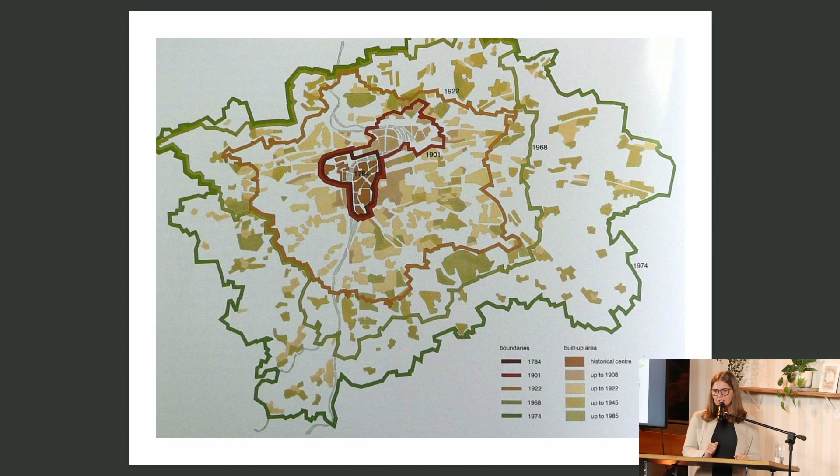Again, we are in Prague. A picture you might see a little bit here because someone was presenting Paris. So we also had our very own Le Corbusier, Josef Havlíček, and he wanted to add some high-rise buildings into the tissue of Prague. So maybe you recognize the famous bend of the Vltava River on the left part, and there, right in the center, right behind the old city, you see those three skyscrapers.

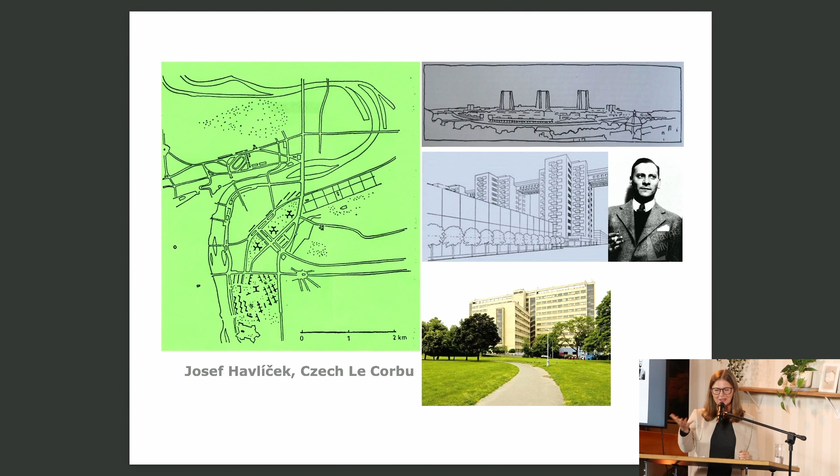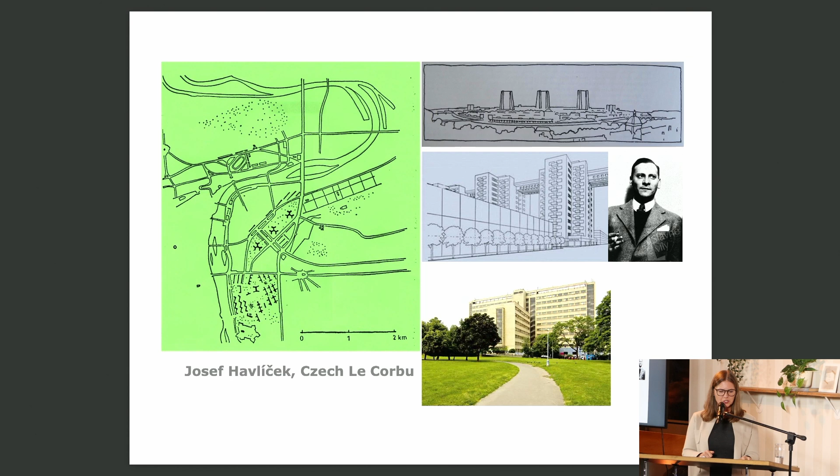One of them was meant to be a United Nations building because at the time they were seeking a new seat. Unfortunately, finally it wasn't Prague, so this was also not happening. Havlíček was also author of something which is very close to unité d'habitation. So the building at the bottom, this is an experimental housing. Very famous, but with a lot of problems. They had a very minimal kitchen, so it never worked in the intentions that it was planned. But there was a very, very strong vision behind it.

So going into mass housing, we discussed through those two days the aesthetics, how important the former aesthetics, the original aesthetics of this housing is. And let's say that for the people in Czech Republic living in those estates, most of them, they really don't care. It has a lot to do with the situation that they were not really voluntarily choosing to live in those blocks of flats. There was basically a list of the families, and when you came to the top of the list, you were awarded some type of housing.

But I have to say that this housing was appreciated, because comparing towards the derelict centers of the cities, and I already mentioned that the situation in many, many centers of Czech cities was really derelict, really hard. This housing in the outskirts, but still, as you have seen in Prague, quite near to the center, connected with tram or even with metro, that was appreciated because the quality, the comfort was really not comparable with what you had in the old cities.

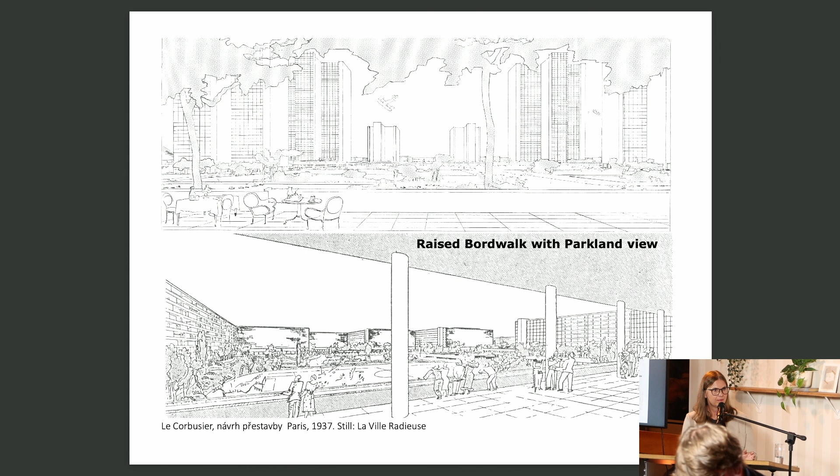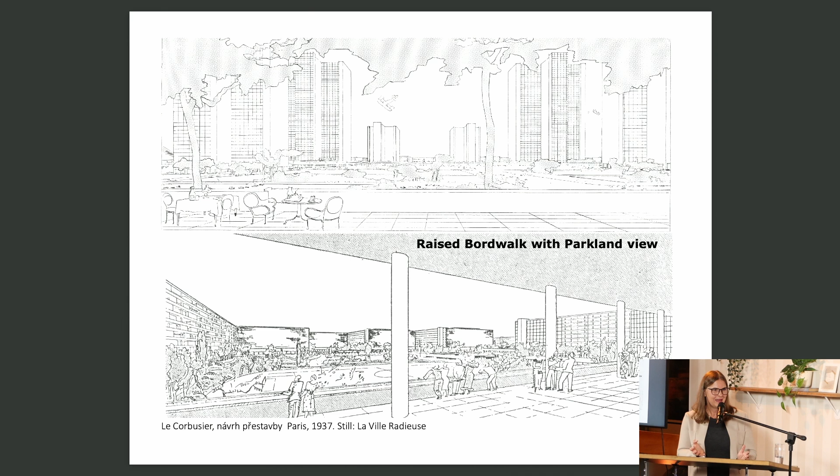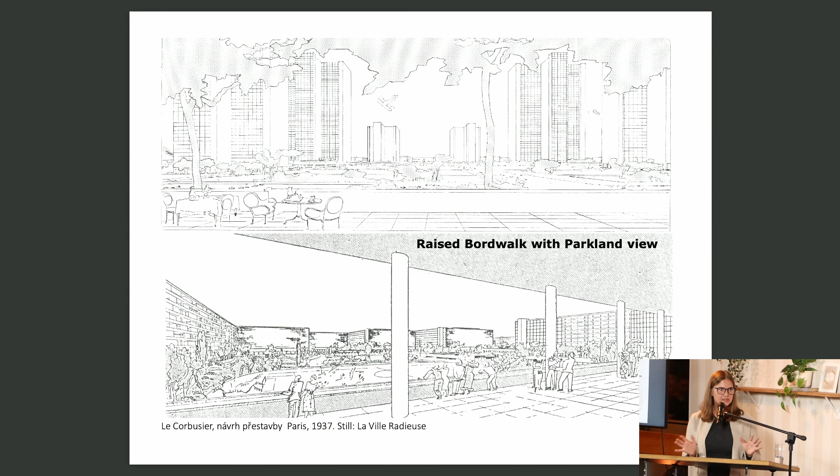The examples we had where it was tried, it was a disaster. Because there is a very old psychology behind it. If you're walking through the open space and you don't feel comfortable, you can always escape. In the closed corridor or at some elevated sidewalk, this is limited. Plus there were issues with maintenance and many other things. So this ideal approach was used somewhere, but not massively because it generated a lot of problems.

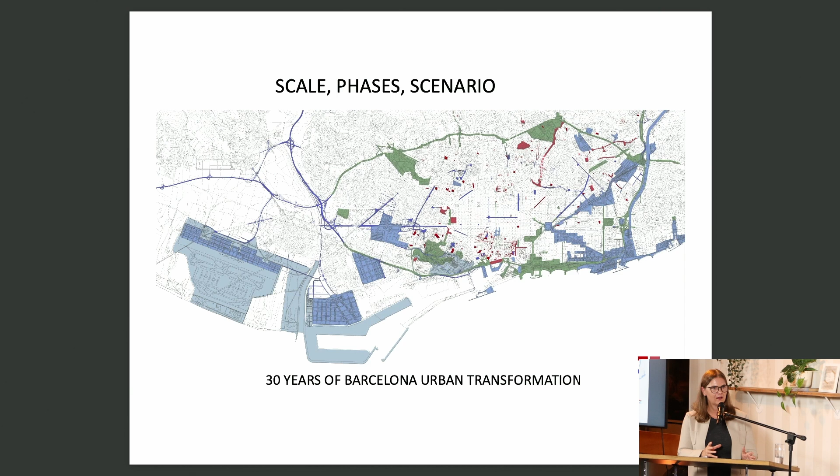And we spoke about infrastructures a long time. So we already know that the infrastructures on the level of technical infrastructure and transport infrastructure, but also public infrastructure like schools and amenities, are very important. So that was the second level. And the third level were public spaces. So what to do with larger areas like the 80% of the public space we have in the mass housing, how they can be changed and what will be the steps.

So the question is, do we allow the modernistic neighborhoods to grow and change? Here you have the original design of Ildefonso Cerda for Barcelona, and the steps which actually happened in the next, well, not only years, but tens of years. So the question is, is the original design weaker today? And if we're saying yes, where is the boundary?

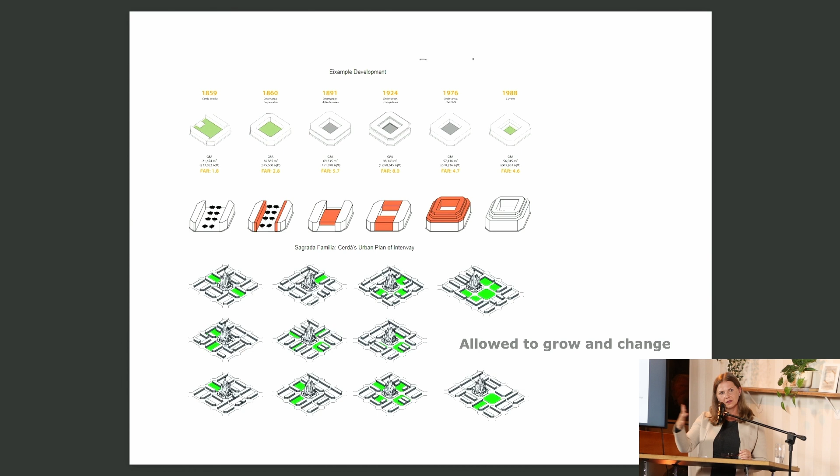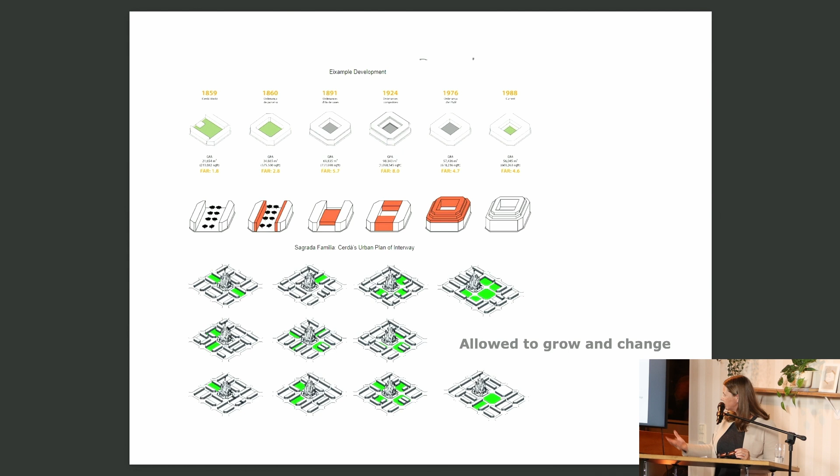So would we be able to set a similar boundary for the modernistic neighborhoods? Because I think that we all agreed through the discussions in those 2 days that some change is needed, but the definition of the boundary is needed as well.

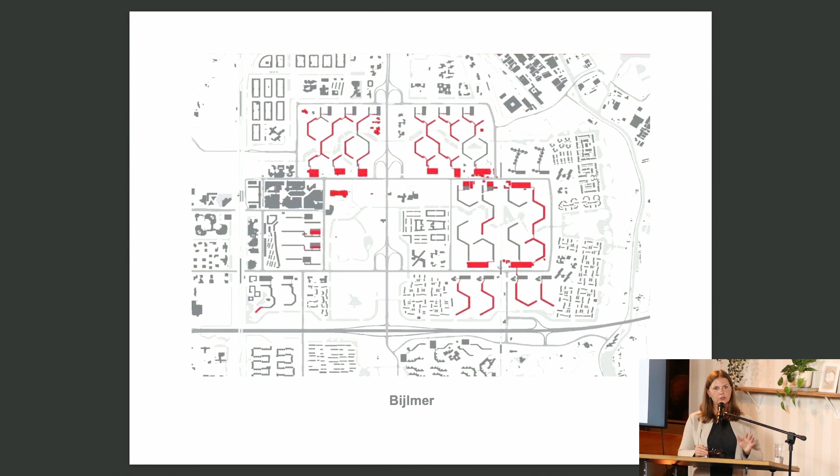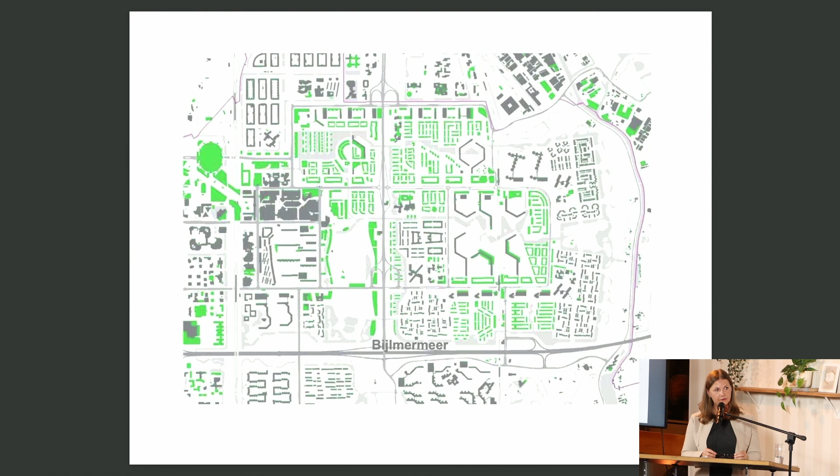So the question of density, how much, again, where is this boundary? Up to what amount are we able to add, not to destroy the strong original concept of the modernistic neighborhood? So this is, I think, also the question we have to think through, and maybe this will be a part of a manual we partially agreed that we will work on.

And I'm not saying that this is the only way to do it. This is just a question, and I think that can be a very interesting discussion if we allow it, if this is something which is imaginable for us, because I think most of us really appreciate the modernistic approach and the modernistic neighborhoods, modernistic architecture and urban design. Okay, next, please.

When I was thinking what would be the imperatives, the important words, the important actions which should be taken in the modernistic neighborhood, what came to me was that actually I don't think that it's different from any other neighborhood. Not that much. What you're looking at is a recycling process of a building.

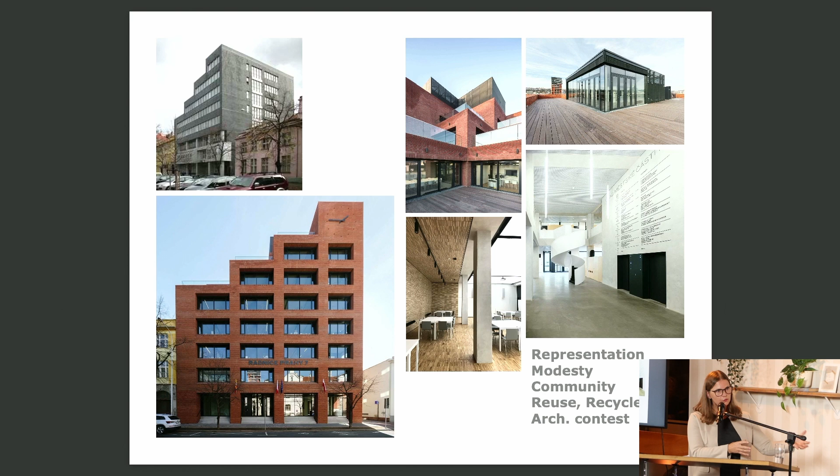But once you get the proposals and once you get the pictures, then the discussion is much better. Then maybe you will really find out what is important for the people who have no architectural education at all. Okay.

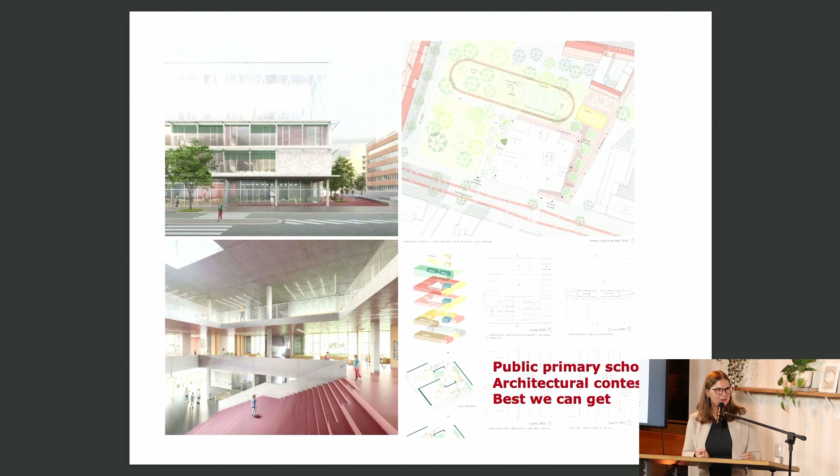Public primary school, again, an architectural contest in an area which is really derelict. And again, we were trying to find through the contest the best solution possible with a very limited budget. So to put the school somewhere where it was not imaginable to have one was a part of the process and of the challenge. And next,

not only in the traditional city, but also in the modernistic neighborhoods, the connections are important. I was quite surprised when we walked through Neustadt that there were some fences, because I'm not used to seeing them in Czech modernistic neighborhoods. You're not allowed to put fences anywhere because the land is owned by the state or by the city. Generally, the very low fences are just around the children's playground or spaces like that, which should be protected, but not because that's the property of someone.

And also, I took pictures where there was a sign saying that's private property and you're only allowed to park your car there if you paid some fee; that was also in Neustadt, such signs. So I was surprised that there were already areas which were more like private or rented, or I don't know how to describe it. Maybe in the discussion you can enlighten me how it really works here.

Please, can you go back?

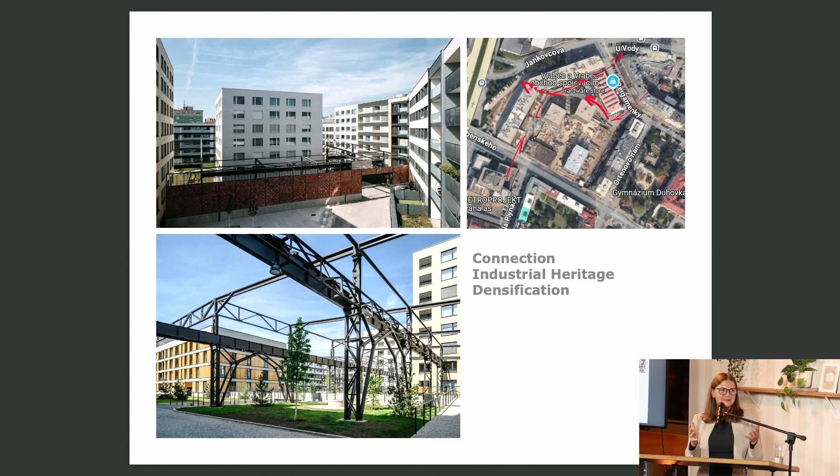This is just an example, but connections, the space without fences, without additional spaces where you can't go through and you have to go around. This is something which is very important also in the modernistic ensembles. Generally, they are there, but I have seen also some projects where this public space was really divided by fences into very small pieces, and then the whole thing ceased to work.

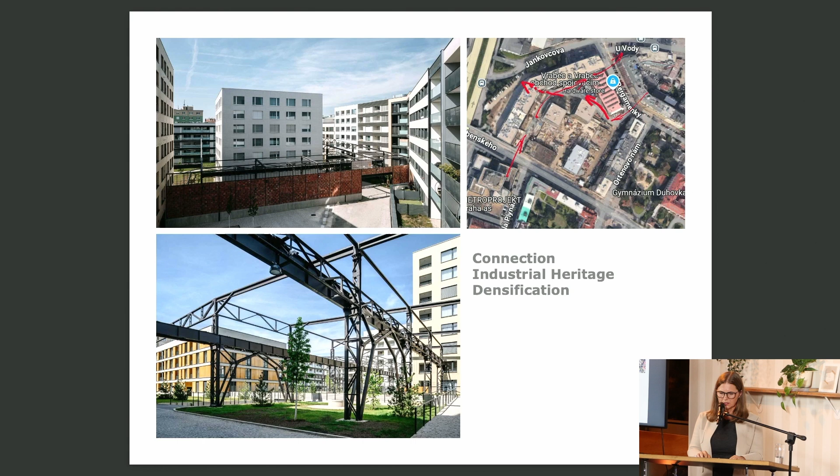Here we are by the riverside, and this is representing an approach towards public spaces. The biggest problem I see in the modernistic neighborhoods is that there are a lot of public spaces, at least in the case of the Czech Republic, and they are not programmed. Yes, there are some children's playgrounds, but the majority of the space in our context, and it might of course differ in different European countries, is just empty and quite badly maintained, because the amount of money you're getting for maintenance is really low.

So to add something which will be at the same time inclusive, programmed, and resistant. This is a very important issue for this public space, this park, that everything is resistant. Also because it's a flooded area, so it was designed so that the flood can just go through it and nothing really happens. All the areas are inclusive, they are open.

They are using advantages of the landscape and of the remains of the industrial heritage, but they are programmed. So of course you can do whatever you want there, but there is always something which allows you to do something specific. If you're using it in another way, then it's up to you.

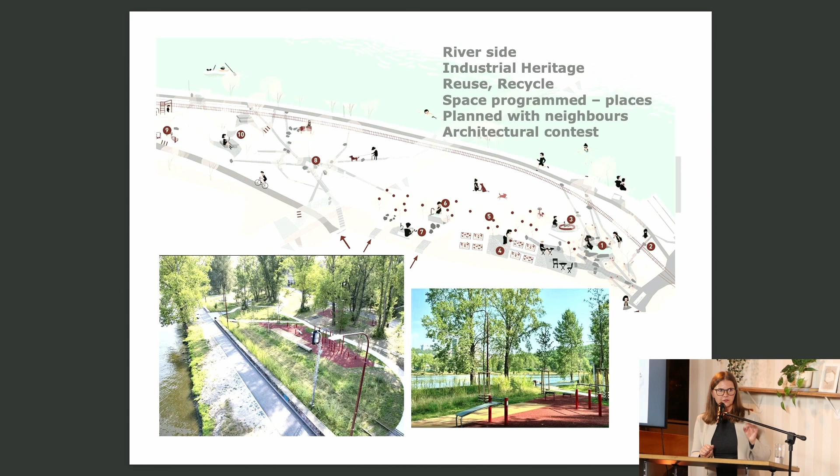So here, the use of the landscape, because in the modernistic ensembles you have different types of landscape. Somewhere it's more monotone, somewhere it's really rich. What I have seen in Nantes, when they did a conversion of the industrial island, the first thing they did, they went through the whole landscape and made something they called a map of treasures. Even if the treasure was a tree or a small garden which unintentionally or intentionally happened to be there, which are actually the tiny spaces we do have in the modernistic ensembles as well.

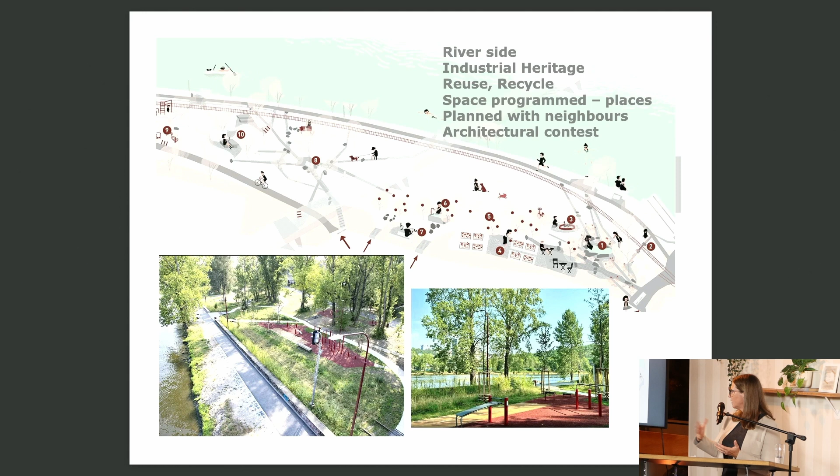So the map of treasures, and then maybe more programmatic areas to encourage people to use the space, which is significantly bigger than in the other parts of the city.

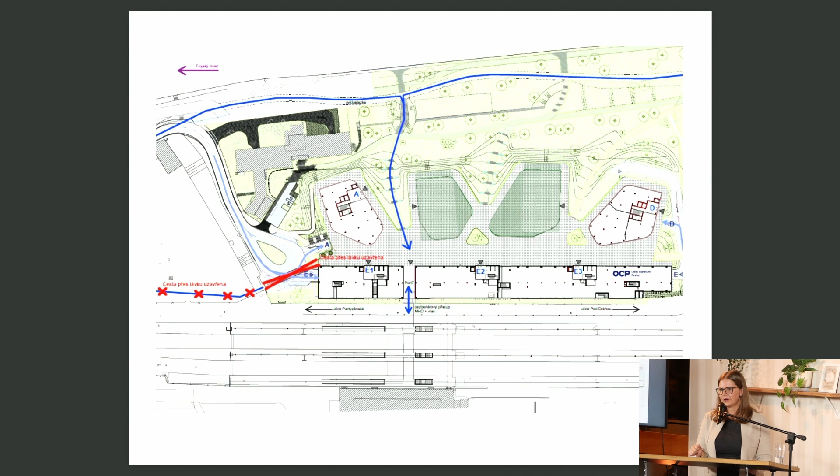Here we are back to the shortcuts, to the connections. We have also seen in Neustadt, and I think in many of the other examples, that everywhere public transport with quite a large capacity, like a metro, tram or even train, is needed to ensure livability, to ensure a good neighborhood, so that people really will want to stay there for a longer time. This we are particularly proud of, because this is a passage through the railway station.

Okay, next. First, there was nothing. There was a sign: stop, you can't go along the river. In the second stage, this is the picture on the right.

We just convinced, and again, it was with a private developer, we convinced them to tear down the wall and to open the passage by the river. And finally, this is the picture on the right down. This is the passage underneath the railway station towards the river. And this is a passage from the hub where you have tram, metro, train, and the buses.

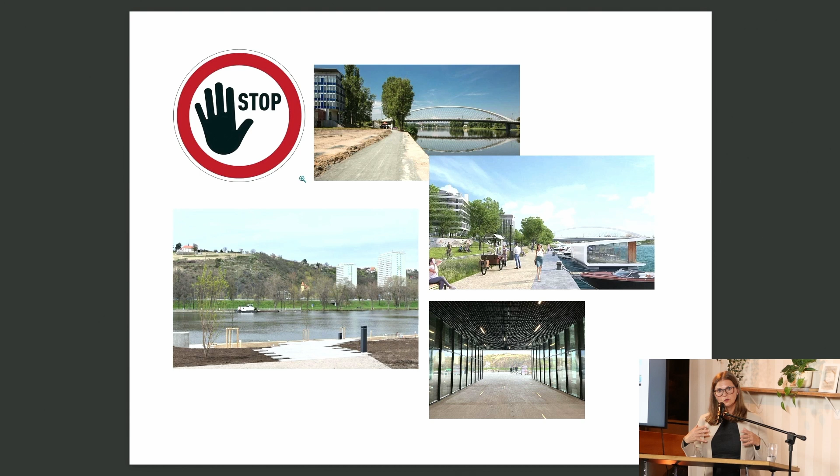And maybe you say, okay, well, what's on it? I have to add that this is a flooded area, and that tiny passage was worth 40 million crowns. And the railway administration was not really willingly doing this. They did it just because we pushed hard enough. But this connection is now establishing a shortcut, and there are really thousands of people who are using the passage and using the walk along the river, and this continues with

the park. So again, when we apply this on the modernistic neighborhoods, that will be about establishing not only the places but also paths through the landscape. So along those roads or sidewalks, you can have some places where you can gather, where you can spend your free time.

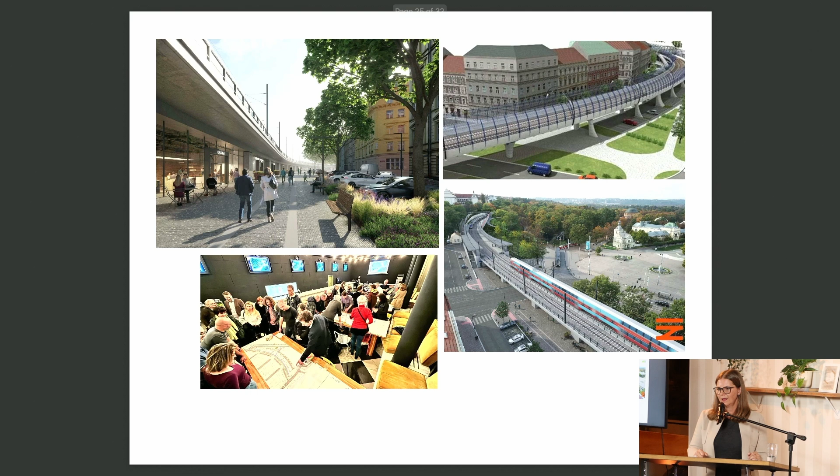Here we are back by the design. This was the hardest thing I did. That was convincing the railway administrators that their project, which you can see here up on the right, is not really fulfilling the needs of the public space. Yeah, the whole structure was covered by glass, and you don't see it, but somewhere in the structure there were also reinforced concrete walls, sometimes also 8 meters high, just to ensure that there will be no noise problems between the railway and the neighborhoods.

Because I have to add that we have a very strange law against noise. So basically you can't build near the rail track because the noise is measured in front of the facade always. So you can have a double facade, then it works. But by the older neighborhoods, which is the case here, it will not work. Finally, we convinced the administrators that they should try some solutions from Switzerland. So finally, you have very low barriers. You have some fancy things in the train tracks, and it works. And I think that everybody's really proud of this solution, and they have it everywhere on the webpage.

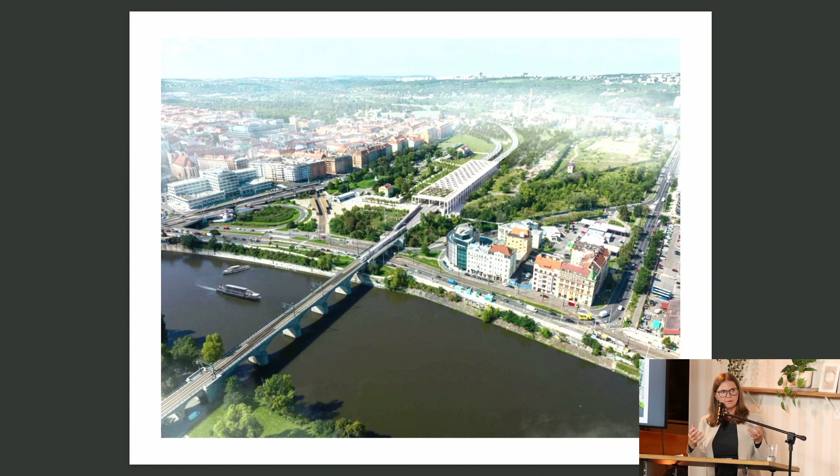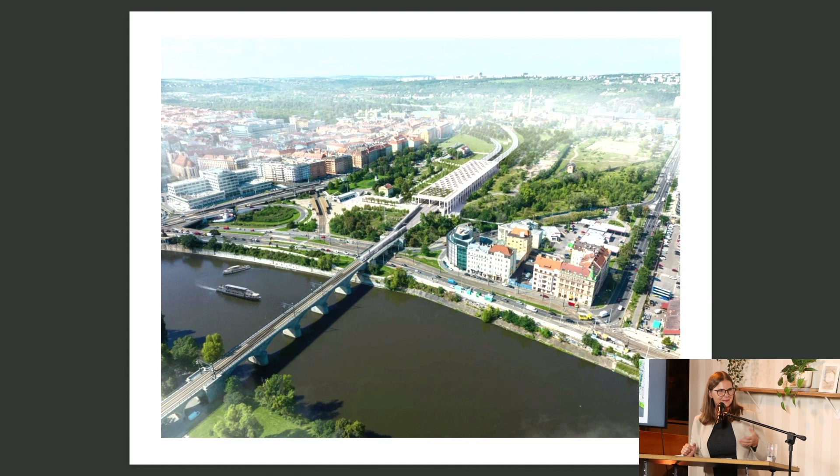So what I wanted to say is that maybe the approach we are trying to shape up and think about is not only for modernistic ensembles. It is also for those parts of the city which are going to be built. Yeah, because from my experience, the developments which are now introduced as new parts of the city are not much better, at least in quality of the apartments, at least in the Czech Republic, than what we are looking at in modernistic ensembles.

This line in the middle, it's actually not there. And here we are by approaches. We named this a street. This is an area with a railway station, and please go one step there, and then we will. No. Up. One more. Yes.

This is a place which has very important historical and cultural significance. This is the railway station from where 50,000 Czechoslovakian Jews went to concentration camps. And at the end of the war, many thousands of Germans were expelled, actually from the same station under more or less the same circumstances, like with the 50 kilograms per person. Then please back.

So some of the parents who went to the concentration camps from this station gave up their children to the trains of Nicholas Winton. I don't know if you have heard about him. He saved around 700 Czechoslovakian children, and he set them on the trains, and they traveled to Great Britain, and British families fostered them till the end of the war.

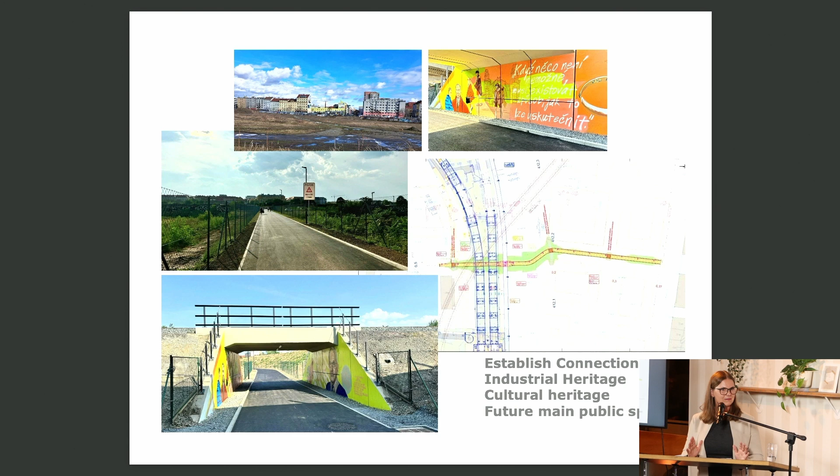And we name it Nicholas Winton Street. Of course, it's no street. But the wording is important. The story is important. Yeah? The narrative is important. The park you have seen, we named it Park by the Water, even if in the first stage there were only some remains of the concrete panels. It was already park. This is Nicholas Winton Street, even if it's for the moment just the path through the area. Please.

And this is how it would look like in the future. So it is a path through the area, but at the same time, this will be the main axis on which the main public spaces will be connected. Again, resilient, inclusive. This is a critical connection, and the whole place before functioned as a sea. So no way how to go through.

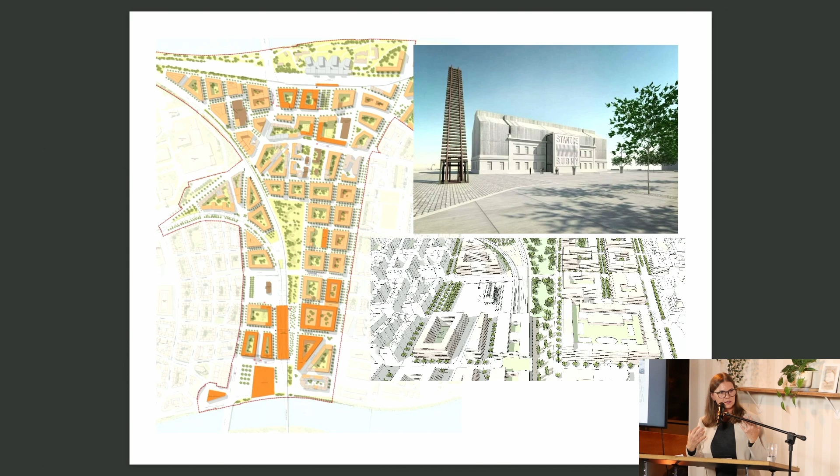Yeah, you just had to go around, and there are, at least in our case, where you have larger ensembles, there are areas where the situation is very similar. So it's not well maintained, and it's dangerous. Maybe not really, but in the eyes of the community, it's the space which is not safe. Sometimes, and this goes much deeper, this is not achievable only from the city district point of view. This is a new connection which is enlarging the mental horizon, like the Nicholas Winton Street.

So again, first we just went there with some boats and we took the people from one side to the other. Then we convinced the city, and there was a little ferry. And almost everybody was laughing at us that, ferry, that's really crazy idea. But after the ferry took, in 5 months, 70,000 people there and back, then it was a path through to the pedestrian bridge. So sometimes it's about small steps, so I wouldn't be afraid about small steps, just to do one at a time, yeah?

And the second, like in the case of Barcelona, be prepared for the next step. So not just to take one and then, well, okay, we will see. No, to have a scenario and to be prepared to adapt, of course, according to the conditions. This was again very cheap project. I have to underline that we don't have much money as a city district.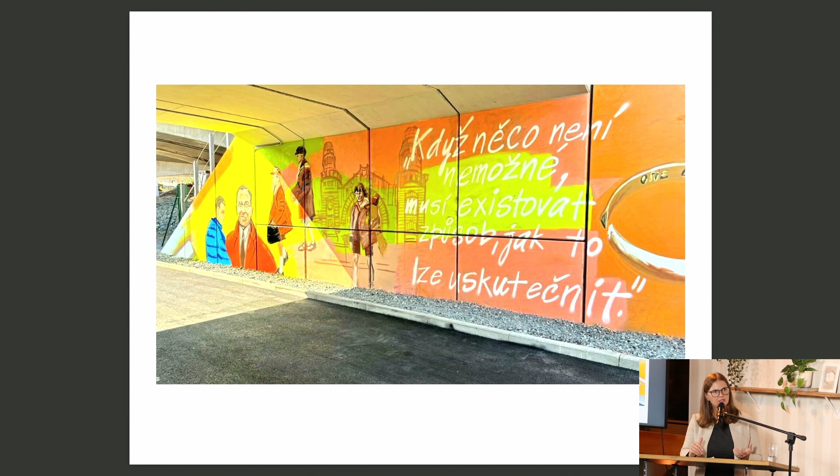Then it's very important to give back dignity to the space. And the dignity must not necessarily be like large embellishment. It's not about decoration. It's about dignity. It's about giving the space some purpose, not only to the space but also to the people, on the level of making good public spaces for them, but also on the level of quality of the apartments.

And here we are back by the standard, the average, and possibly the minimal housing. And I think that we can open those topics in the discussion. It's very important to provide opportunity, continuity, and actually the future, which was all on different levels achieved in the projects I just showed you.

The construct of the future, this is if you feel that you have your position in the community, that you can actually use the public spaces, that you're welcomed. It's very essential to provide the best solutions on the level of landscape, architecture, art, and urban design, and the tool can be, of course, urban architectural competition, art competition, any kind of competition. This is a tool which is really working.

Also, it's very important to achieve representation of the community in the public space. So all the projects you have seen were done with involvement of the people from the beginning and on many levels, not only by throwing some fancy meeting at 5 o'clock in the afternoon, because it's not accessible for everyone.